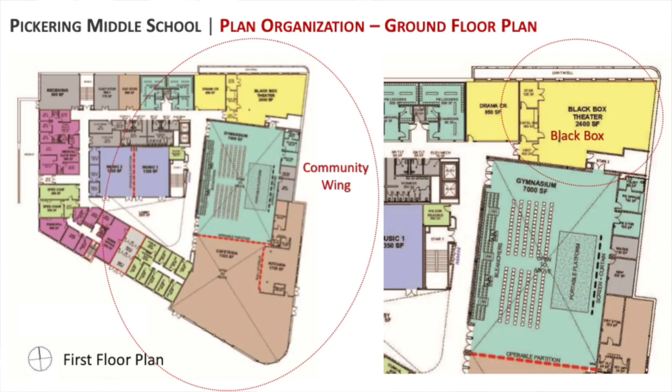The gymnasium will also function as the school's auditorium. On the right-hand side of this slide, you can see some bleachers on the left, some seating on the floor, and then a platform—that's where large community events and presentations will take place. Above that, in yellow, is a space for the drama program known as a black box. It's really a workshop for the drama arts program, but it's on the first floor and will be accessible after hours for small drama presentations.

When you get up to the second floor, that's where we start to have some classroom areas and more support offices. There's also a wood shop and a computer lab. That's on the left side of your screen, and on the right side is the third floor plan.

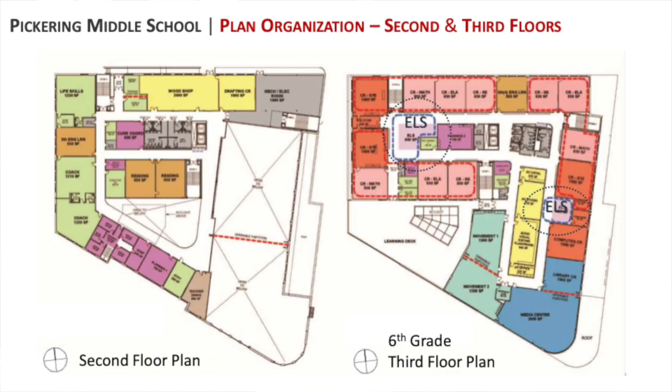On the next slide you'll see that the third, fourth, and fifth floors are similar to each other, but each floor houses one of the grade levels. The third floor houses two clusters of 6th grade students, plus the media center and some movement studios. The 4th and 5th floors will house the 7th and 8th grades, with some other special subjects as part of that as well. This school is vertical, we'll say—it's 5 stories.

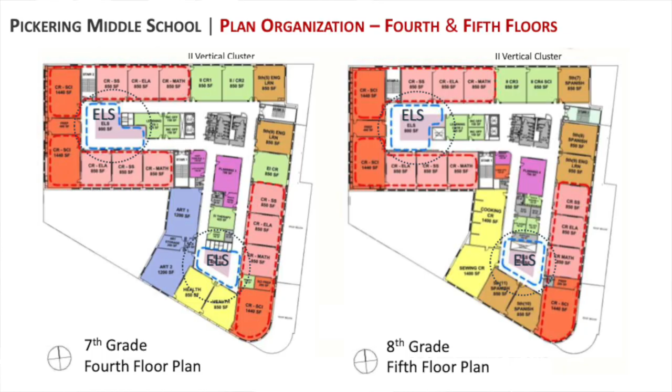We're putting all the classrooms around the perimeter of the building, all the learning spaces really, so that they have natural light through windows. You'll see a couple circles here in blue with the initials ELS - those are extended learning spaces, so we're trying to take advantage of space inside the building also as learning space. This is one of those extended learning spaces, and it would be used by 2 of the clusters in the grade level for group activities or pull-out support for various needs.

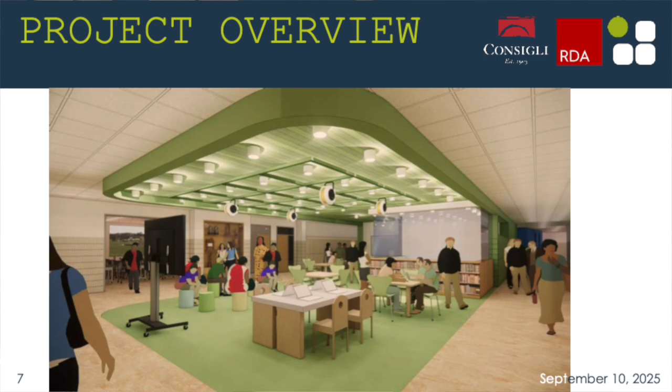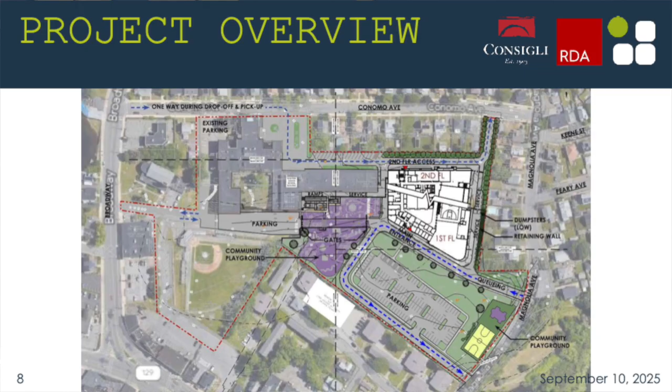As far as the neighborhood and the neighborhood impact - along the top of the page and the right-hand page, that's where the building is going to be closest to abutting neighbors. All these various circles that are different colors are different kinds of evergreens that'll be a permanent hedge between the school, the driveways, and the backyard of the abutting properties.

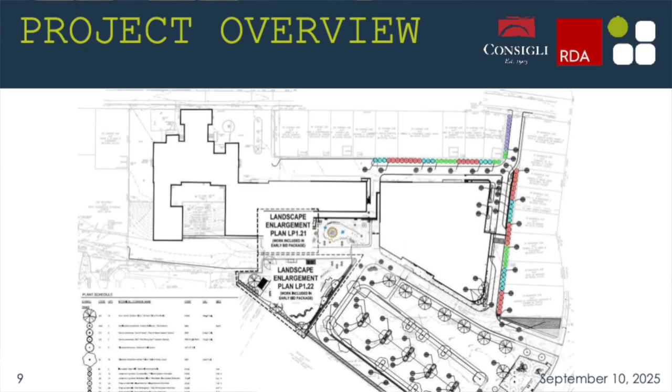None of this is deciduous where the leaves will drop - these will all be green all year long. We're mixing up the species, so it's not just the same thing everywhere. But they all are going to grow about 30 feet tall, so that's equivalent to about 2 stories.

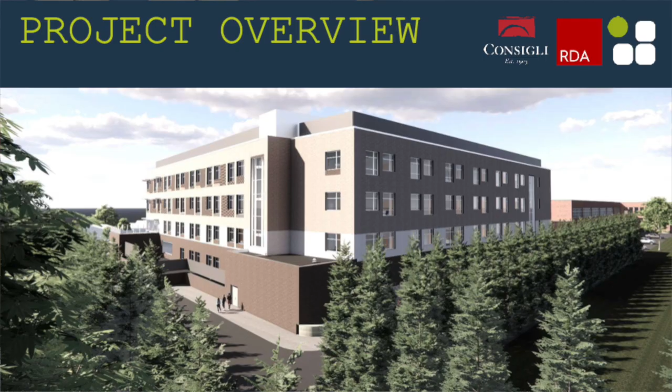If you were a bird up in the air looking down, Magnolia Ave would be on your left, Conomo on your right. We're trying to give some indication of what these evergreens will do when they're up against the new building.

So with that, at the end of the presentation, we're available for any questions.

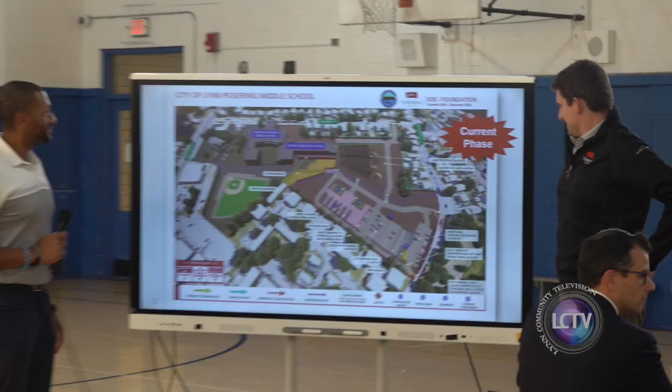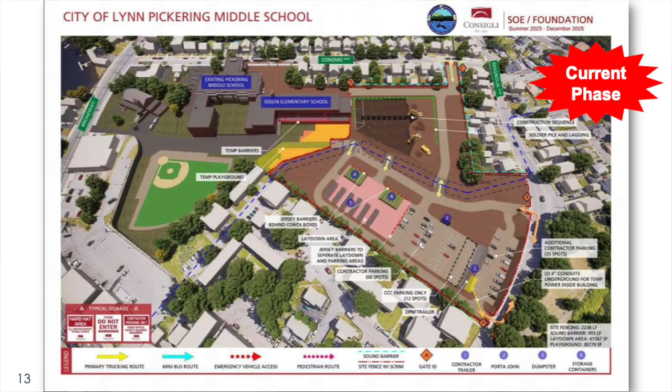Currently, we are about 65% complete with our ground improvements, which we know was a very big task for this project. Being 65% has allowed us to actually start foundations, so as of today we had our first concrete pour - our first foundation pour was done today, which is again a huge milestone for the project. So that is what we're going to see for the next 6 to 8 weeks: a rotation of foundations being installed and the ground improvements completing.

Once that 8-week mark's over, we're looking to start steel somewhere around the Thanksgiving timeline. That is a major milestone, as we all know, once you start seeing the steel go up, because for people who don't see the earthwork we just did - for example, we put in 1,000 earthquake drains and 800 rigid inclusions for ground improvements - those are things that are buried in the earth and no one will ever see. But to us, we know it's a big part to get to where we're at. So that's a big milestone.

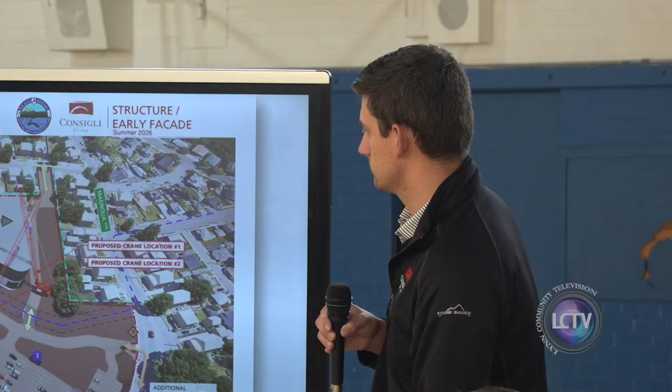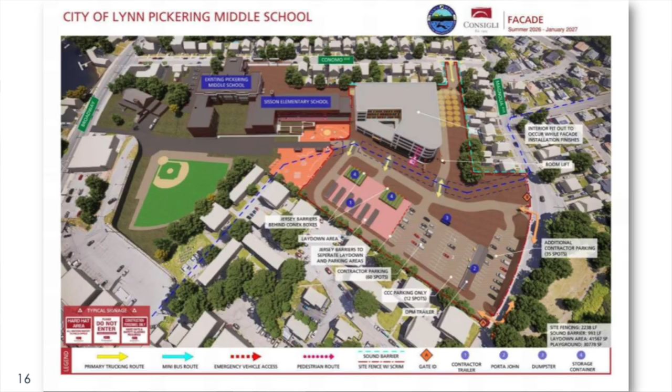This is transitioning again through that. You start to see some of that work on the outside going up. We're going to stay in the same footprint we have now, essentially for that duration of the project as we continue to work on the building.

And coming in towards 2027 is where we start to finish the interior, work our way out of the building. We're going to be doing some hardscapes. What we weren't able to get done now, because as Pierre mentioned, we put a big focus on doing what we could, what we weren't able to proceed with foundation. So a lot of work, utility-wise, infiltration tanks, drainage, is all supposed to happen next year. We're able to get it done already, which is great for logistics, but it meant we weren't sitting there idle. We took advantage of the time we did have.

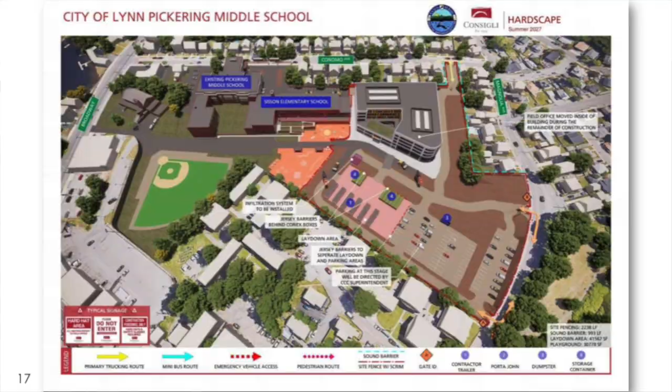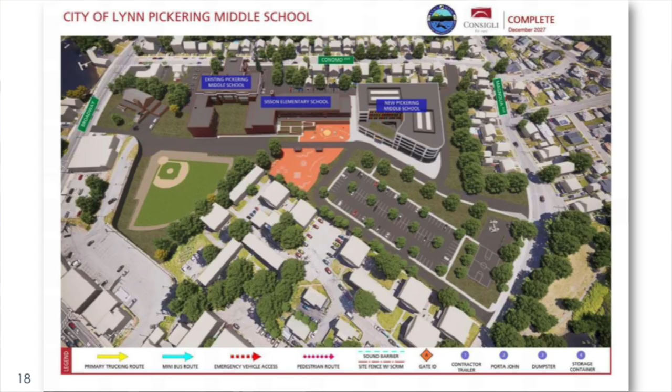And this is complete. We'll talk overall schedule milestones a little later in the presentation, but we are tracking towards a late November, early December completion of 2027 as of right now.

Want to take us through progress? Yep. So in August, I'm sure the people who live close by might have heard a tink tink and a bing bing a couple times, maybe 8 hours a day. Yes, I know. But it was a crucial part to get to where we are today.

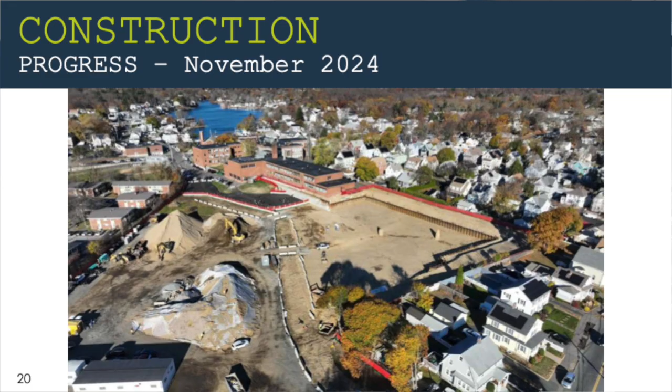This picture shows these were the sheet piles that were installed. So if you look at the next slide, keep going. This was us last November. After the sheets were installed, we cut the site down. You go to the next slide, please.

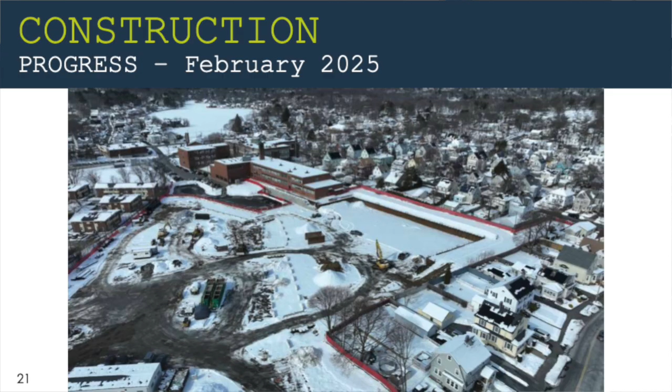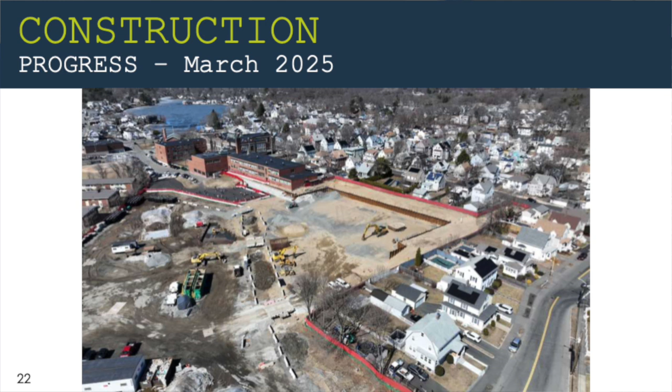We'll be seeing this white stuff soon, unless somebody has a magic radar to say no. All right, this was us in March, and this is when we were into the redesign of the ground improvements. And this is what Brendan was saying. We didn't just sit idle. We took advantage of stuff that was going to happen this summer, even next summer, and we got it complete all during that time frame. So it's a big milestone,

especially for us in the field, to have live water. Hydrants are going to be live, all your sewers live, all your drainage is live. So as we go up with the building, water mitigation is going to be a lot better because everything's tied into drainage. So it's a big benefit for us.

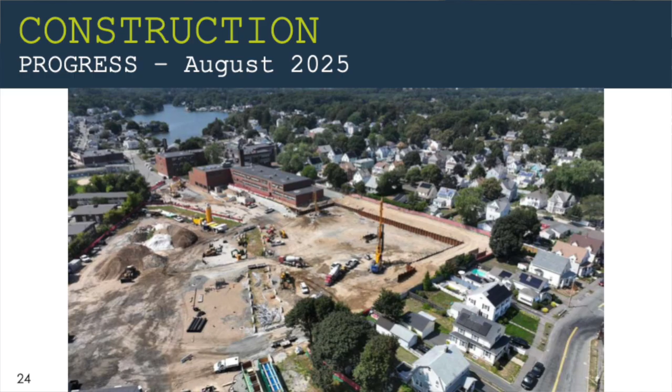And this is when you start seeing the ground improvements exactly. This is the drill rig that installed the earthquake drains and the drill rig that also installed the rigid inclusions. And on this side, you will see the rig that is currently doing what we call a jet grout operation, another stabilization of ground improvements. So that's what we're currently working on, and that's tracking to be complete end of October, right into early November.

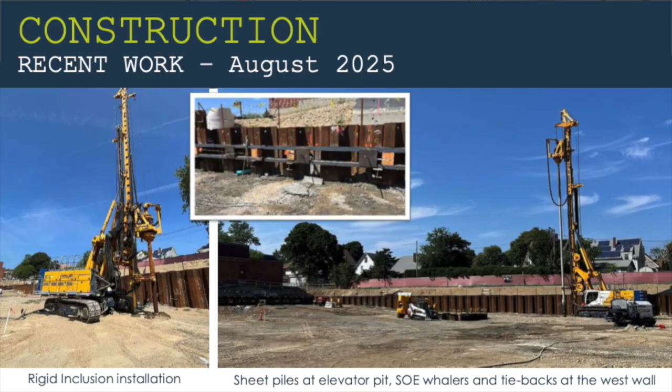So this is the key work that we did. This is the rigid inclusion, concrete columns essentially buried in the ground. They vary in depth from 20, 25 to 35 feet in the ground. This is really for your settlement control. This is tiebacks, installed along this elevation of Sisson, and this is a key element to stabilize everything that happened. So this installation went very smooth. All the consultants are happy. Everybody is very happy with that work as it went exactly as planned.

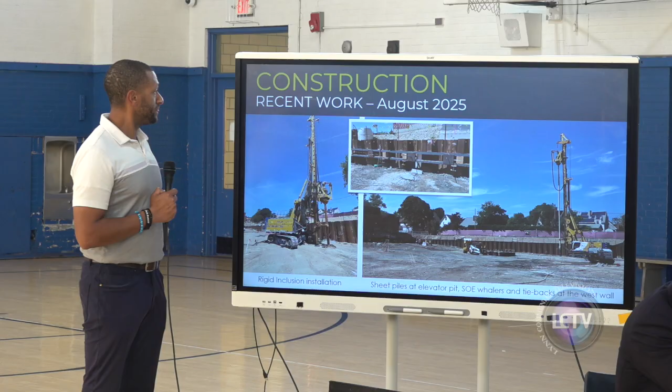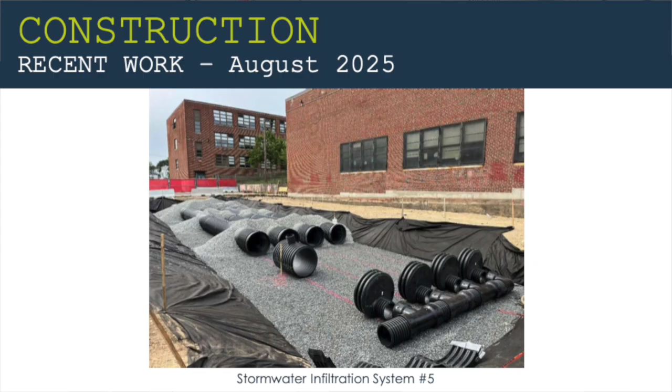This was us racing to complete. Again, this was all stuff that we weren't going to do now, but we took advantage of it now. So infiltration systems underneath the future playground is complete. So when we do come back next summer, we're talking about just putting final pavement down. We're not doing anything underground. I'm not having to tie in anything where disturbance is done to this side of the building.

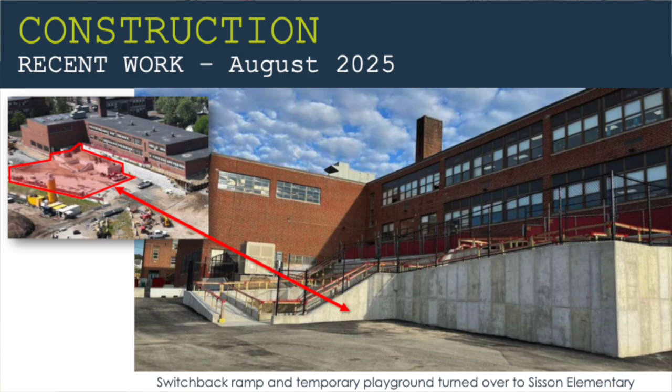And the team worked hard this summer to make sure that switchback ramp was installed and done, the fence installed, the temp rails installed. So that is, again, a big milestone for the project. Brendan and I are definitely happy with the team's progress with that, to get that turned over for the school session season.

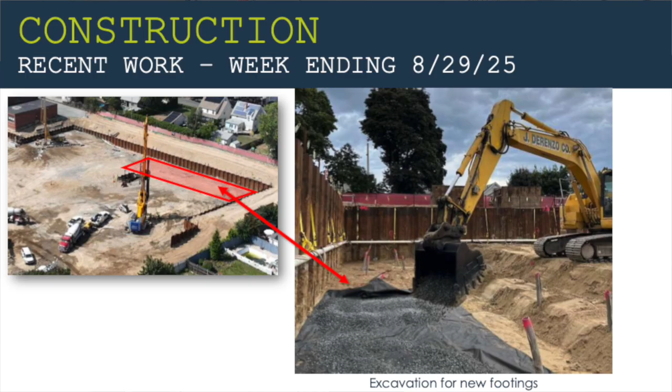And this is exactly where I was saying we had started the excavation. So right here is us excavating for our footings. And next after that, you'll see what is a blob of concrete, and then soon you're going to see some walls. So this thing is looking realer and realer every day.

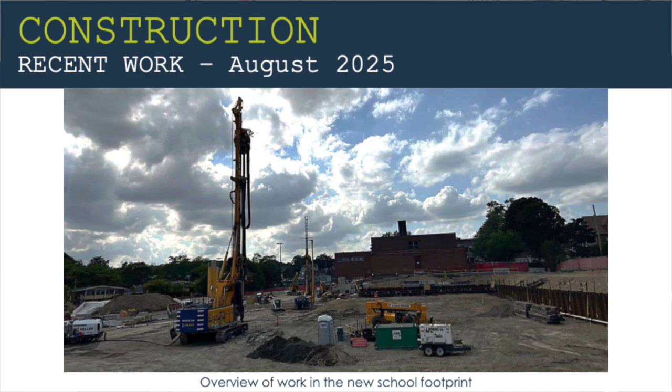And that's us basically currently right now. So rigid inclusions complete for now. The earthquake drains complete for now. And all we're doing is focusing on our foundations at this point and a little bit of jet grout.

So, like I said, we'll complete the ground improvements in November. We'll complete foundations in that November time frame, and then, Thanksgiving time frame, structural steel starts, and then the race is going to be to get the building enclosed by next summer time, so that we're really inside focusing on building the classrooms.

That's what we got for you. Thank you.

So there's a slide missing from the deck, but maybe Brandon or Pierre can speak to it. Yeah, so the one piece missing was our most recent milestone schedule. It just goes through our key dates and key activities to get to that completion date in December of 2027.

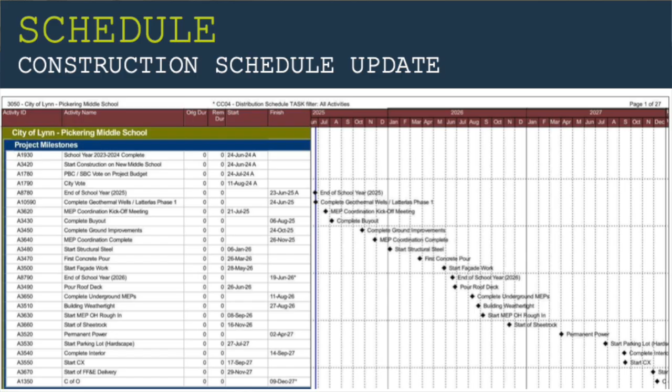We hit on a lot of the major ones for us: getting that concrete foundation done, starting steel, and getting the building weather tight next summer. Then it transitions through all of our MEP work inside, through our main mechanical rooms, all getting us to that move-in date and C of O sometime in November or December of '27.

Also something the team has talked about is once the foundations and steel are done, we'll take another hard look at the schedule to see if there's any opportunity to accelerate or pull it back. But we'll know more in the spring.